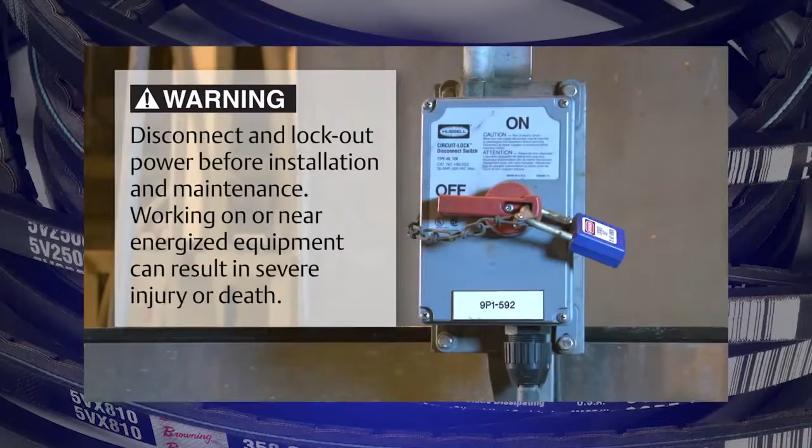Improper belt tension is one of the most critical aspects when we talk about combating premature belt failure. Under-tensioning can cause the belt to slip, leading to premature belt failure, while over-tensioning can cause bearing and belt failure. In most cases, technicians use a rule of thumb to estimate proper belt tension, the most common being 1/2 inch deflection, or deflecting the width of the belt.

But in both cases, technicians fail to take into account the amount of force required to deflect the belt that distance. Ultimately, tension is a function of two things: its deflection and its force. To measure both of these accurately, you will need to use a tool such as the Browning spring-loaded tension checker and follow the steps outlined in this video.

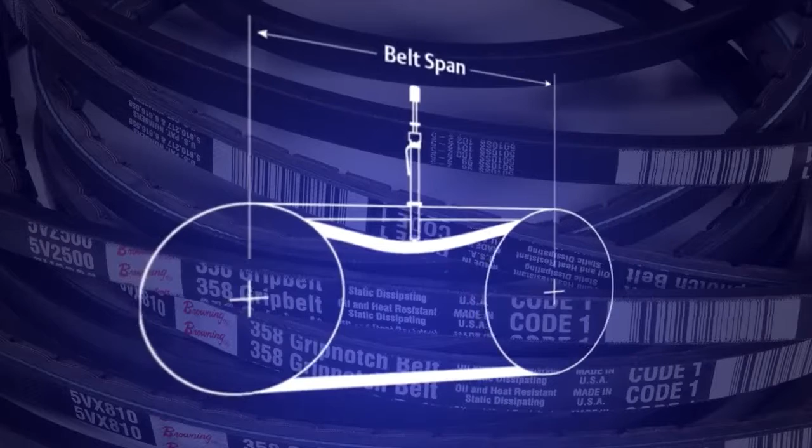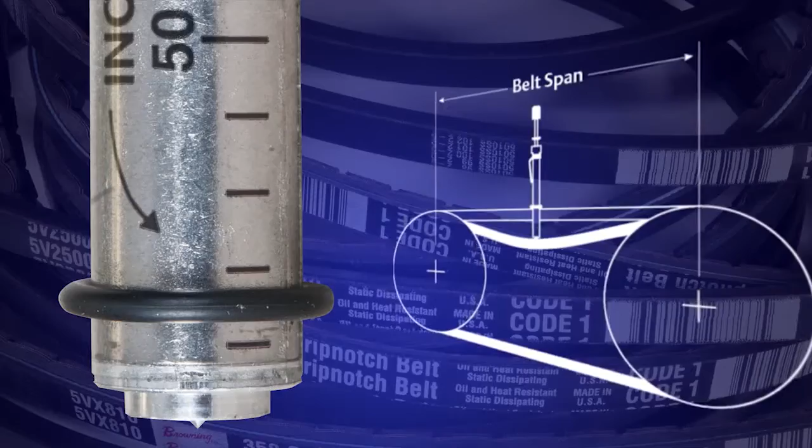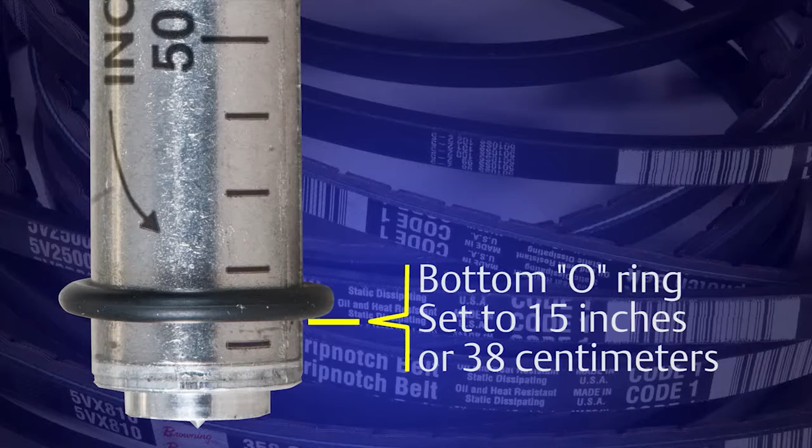The first step in measuring proper tension is calculating deflection. Deflection is a linear equation in that you deflect the belt 1/64 of an inch for every inch in span. Setting the required deflection on the Browning tension checker can be done by measuring belt span and then setting the bottom O-ring on the tension checker at that point. So in this application, I use a straight edge or a tape measure, and I measure span at 15 inches. So 15 inches is the point at which I will set the bottom O-ring for proper belt deflection.

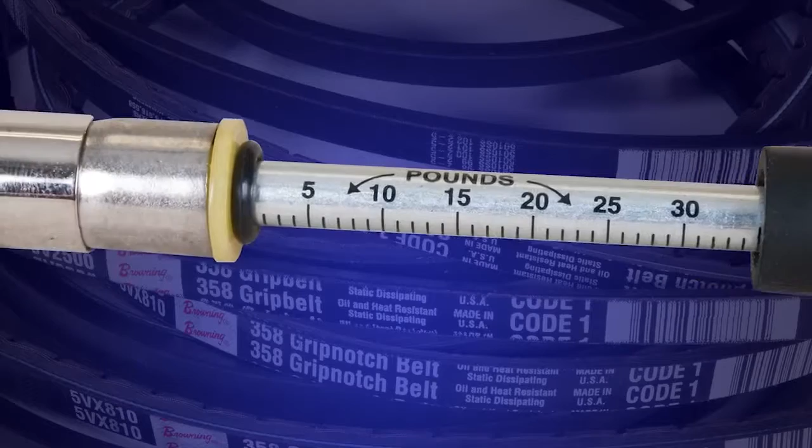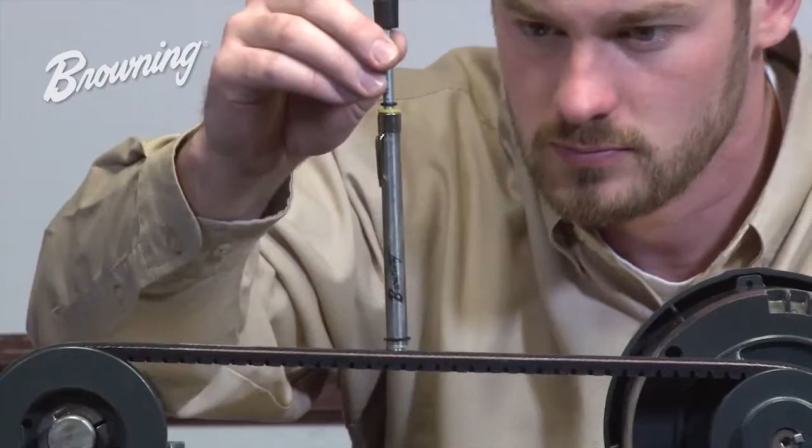Now that you have the bottom O-ring set at 15 inches, you can set the top O-ring at 0. This is done by sliding the small O-ring down the plunger until it touches the yellow or white stop. Okay, now we're ready to take a tension measurement. By placing the tension checker in the center of the belt and in the center of the span, slowly push down on the rubber knob mounted at the top of the tension checker, stopping when the bottom O-ring is in the same plane the belt was previously in.

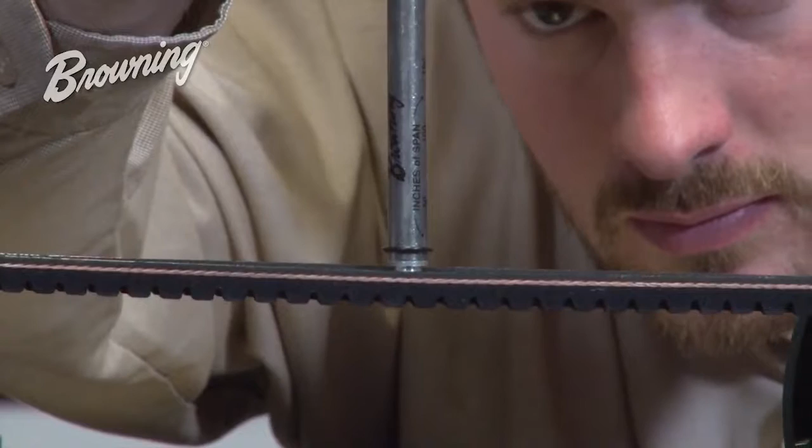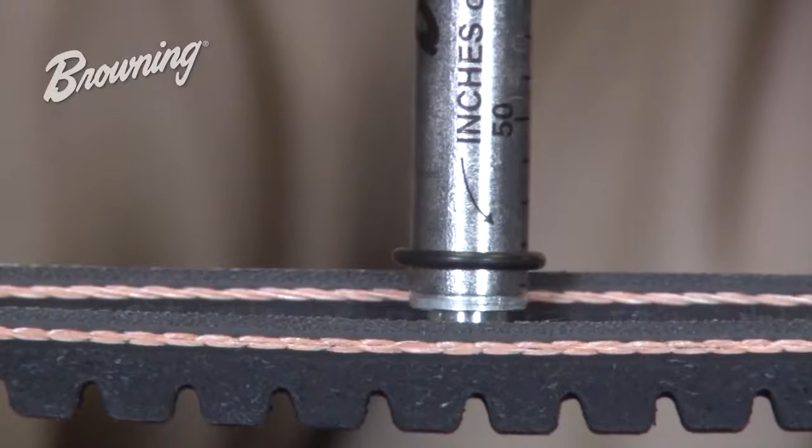Referencing the plane the belt was previously in can be determined by two methods. In a multiple belt drive, simply deflect until the bottom O-ring is in line with the top of one of the other belts. In a single belt drive, you will need a straight edge or a piece of string to run across the top of the belt, and then deflect until the bottom O-ring is in the same plane as the straight edge or piece of string.

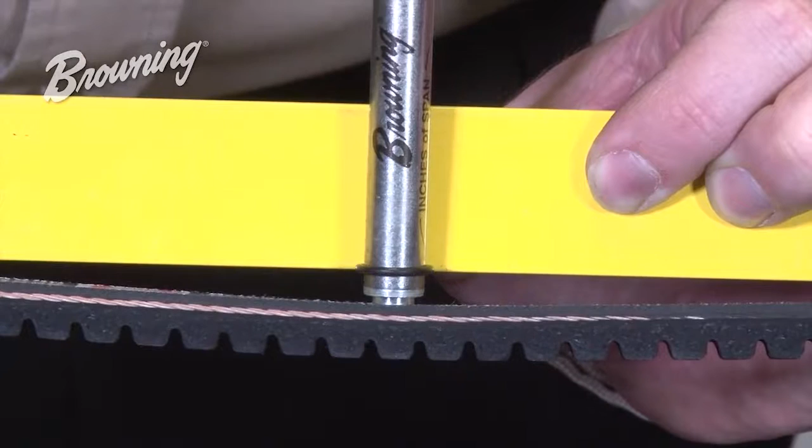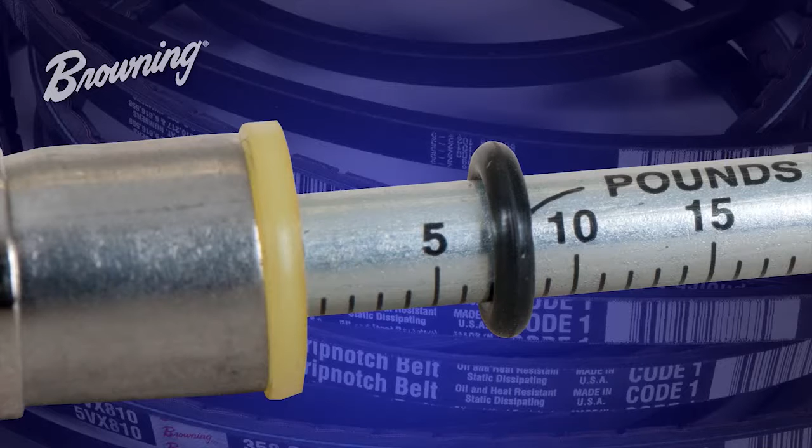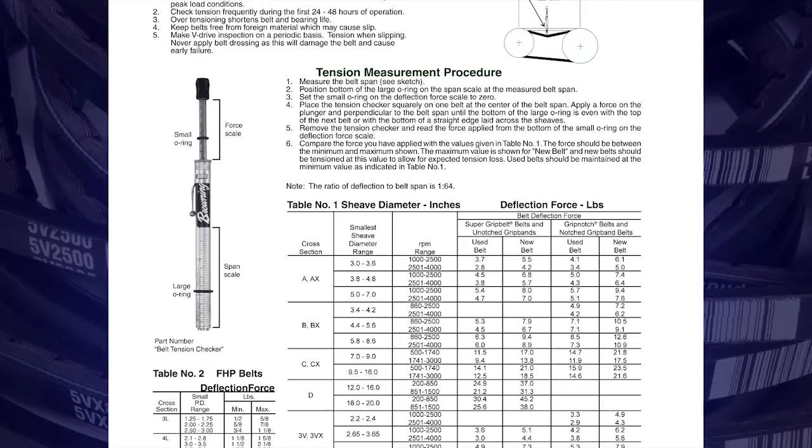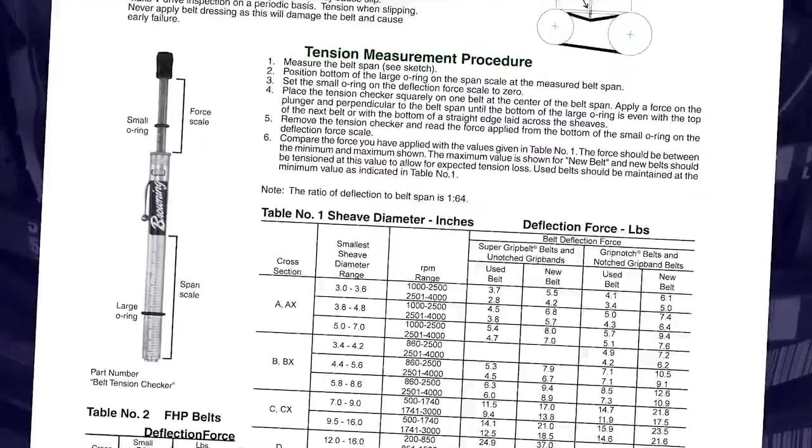Now that we have deflected the belt the recommended amount, the top O-ring will have moved up the plunger and show us the amount of force used. In this case, we have a tension measurement of about 7 pounds. We can compare this to the deflective force charts found in the Browning bearing and belt drive reference guide. These charts can also be found in the V-belt drives and bearing product guide, inside the cartridge the tension checker came in, as well as online at emerson-ept.com. To use the charts, you will need 5 pieces of drive-specific information.

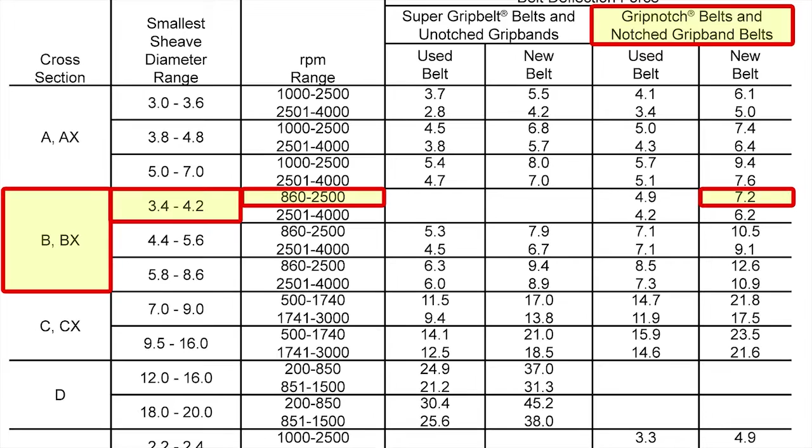In this case, we're using BX belts. Our small sheave is 3.5 inches. Our motor speed is 1750 RPM. We're using Browning Gripnotch belts, and these are new belts. So if you follow the charts from left to right using those drive specifics, you will see that our deflection force should be 7.2 pounds. Our initial measurement of 7 pounds is very close to the recommended deflection force.

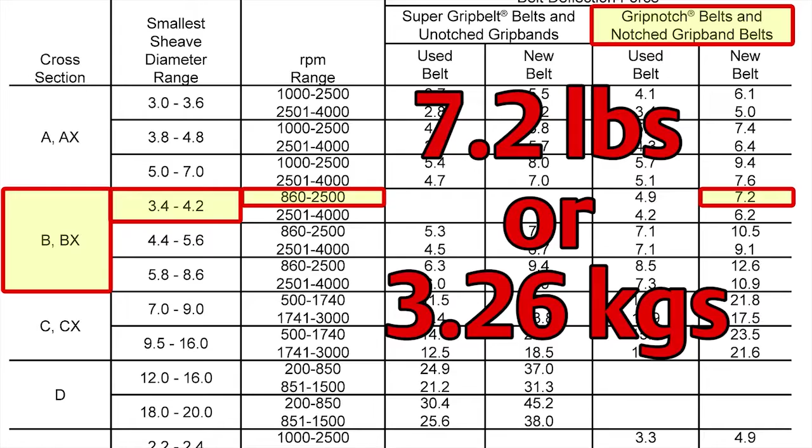Please keep in mind that tension is always changing. As the drive runs, as the belt seats, and as the belts wear into the groove of the sheave, you are going to see tension change. In an optimum situation, we would recommend to retension after 20 minutes, 24 hours, and again after 48 hours. I realize that in some cases, retensioning periodically is simply not possible.

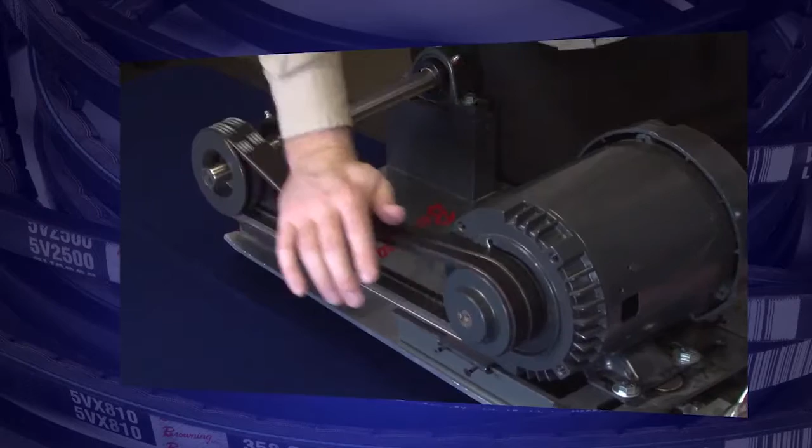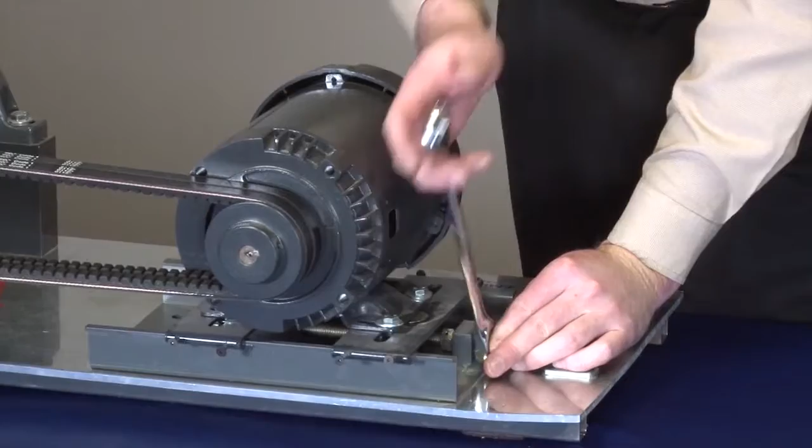So we recommend running the belt drive a few revolutions with your hands. This is just simply to start the seating process. What this does is help the belts wedge down in the groove of the sheave. Once the belts have been properly seated, you will notice a decrease in deflective force. Now we need to go back and retension to the recommended 7.2 pounds.

Then, going forward, retensioning will be required at each PM interval. Please keep in mind, after 8 hours of operation, a belt is considered used, and should be retensioned to the used belt specifications found in the deflective force charts.